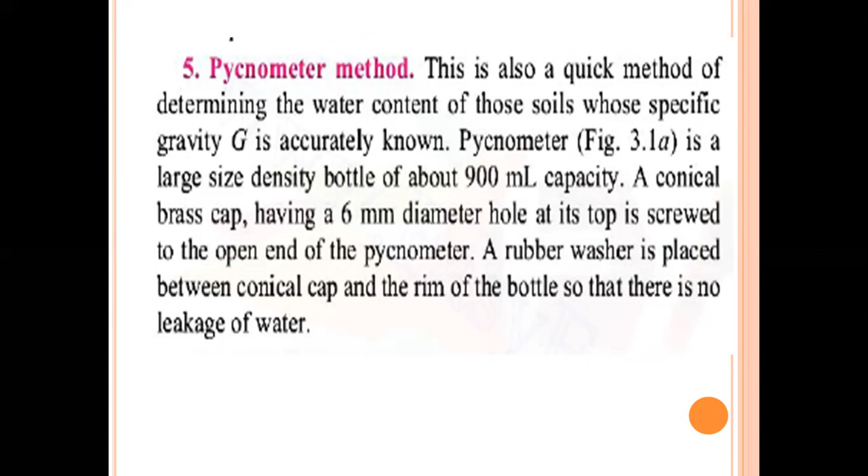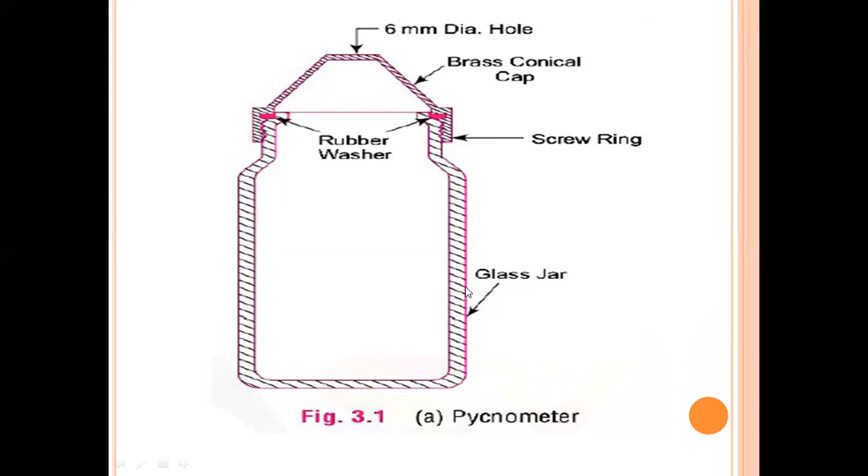The test procedure of the pycnometer method. First of all, we take the clean and dry pycnometer bottle and find its mass M1, the weight including cap and washer. Next, put about 200 grams to 400 grams of wet soil sample in the pycnometer and find its mass M2 with its cap and washer.

Fill the pycnometer to half its height and mix it thoroughly with the glass rod. Add more water and stir it. Replace the screw top and fill the pycnometer flush with the hole in the conical cap. Dry the pycnometer from outside and find its mass M3. Empty the pycnometer bottle, clean it thoroughly and fill it with clean water to the hole of the conical cap and find its mass M4. Observe that in total we calculated 4 masses, meaning 4 weights.

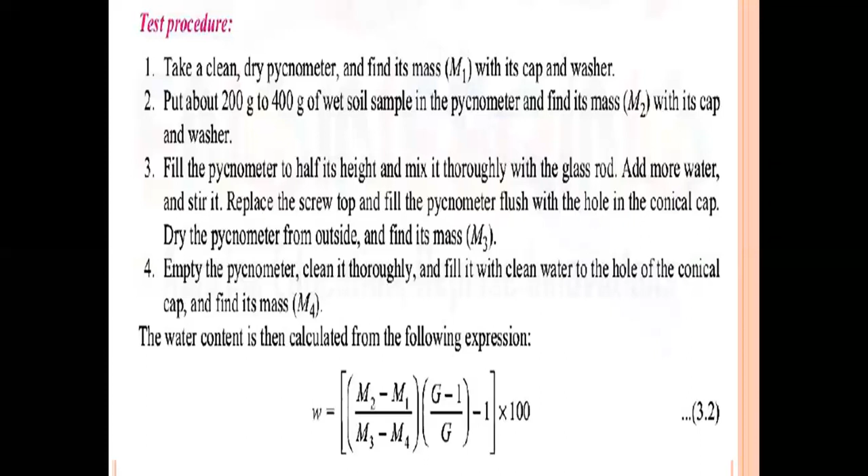Finally, the water content is calculated from the following expression. Water content is indicated by small w. The formula is w equals (M2 minus M1) divided by (M3 minus M4) into (G minus 1) divided by G, minus 1, all multiplied by 100. Here water content is calculated in percentage, so finally multiply by 100.

So here is the water content determination in the pycnometer method, masses one by one. First, the empty pycnometer bottle, totally dry and clean, is the weight M1. Second is the pycnometer bottle plus wet soil, the mass M2. Wet soil means water mixed with the solids. Another is the pycnometer plus wet soil, filled to the top of the bottle with water, taken as M3.

Similarly, all the solids and water are removed, the bottle is cleaned and filled with pure water. Then pycnometer plus water is weighed, and that mass is M4. So first mass M1, second mass M2, third mass M3, and fourth M4.

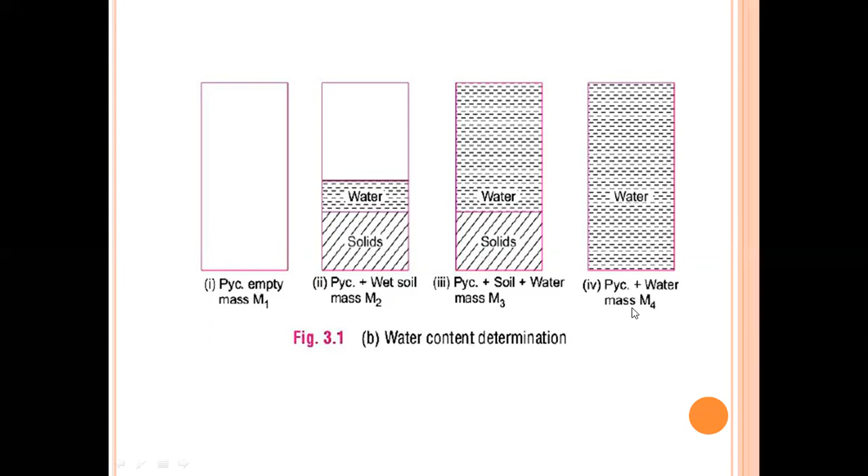This figure shows the dry mass, indicated by MD. MD is the mass of the soil particles. The volume of solid particles will be equal to MD by G. Thus, if the solids in the figure are replaced with water of mass MD by G, we get the mass M4 shown in the figure.

Thus, finally, M4 equals M3 minus MD plus MD divided by G, or MD into (G minus 1) divided by G equals M3 minus M4. From this equation we calculate MD: MD equals (M3 minus M4) into G divided by (G minus 1). Now the mass of water MW in the wet soil is M2 minus M1 minus MD.

So W is the water content, MW by MD into 100. It is the water content formula. Here MW means mass of water. This formula is M2 minus M1 minus MD. So substitute, divided by MD into 100.

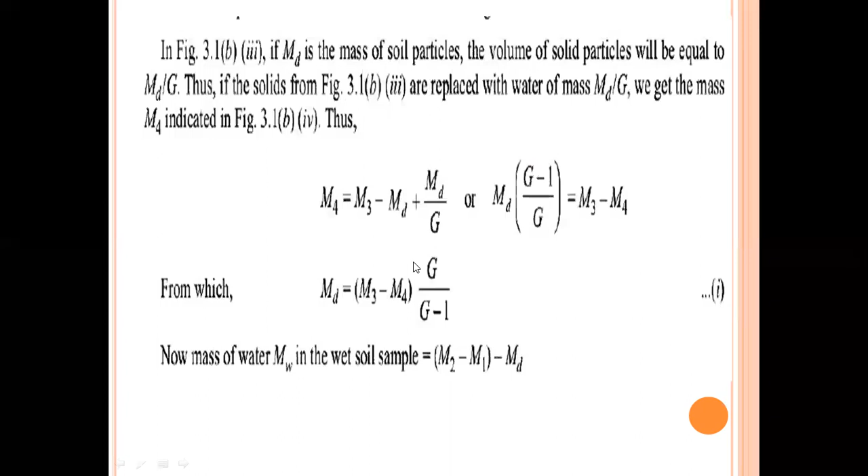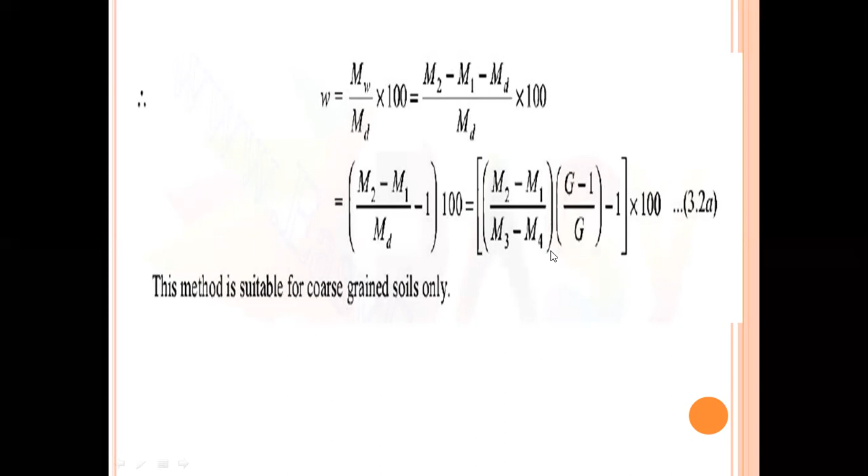So this method is suitable only for coarse grained soils. Here we calculated the water content, then after we calculate specific gravity in the pycnometer method. The specific gravity of solids is determined by 3 methods: 50 ml density bottle, or 500 ml flask, or the pycnometer. The density bottle method is the most accurate and suitable for all types of soils. The flask or pycnometer is used only for coarse grained soils. The density bottle method is the standard method used in the laboratory.

So same method. Here the empty bottle mass is M1 and bottle plus dry soil M2. Here no wet soil, only dry soil. And third one is the bottle plus dry soil, fill the water, and calculate mass M3. And similarly, the bottle totally remove the solids and fill pure water. This value is the mass M4.

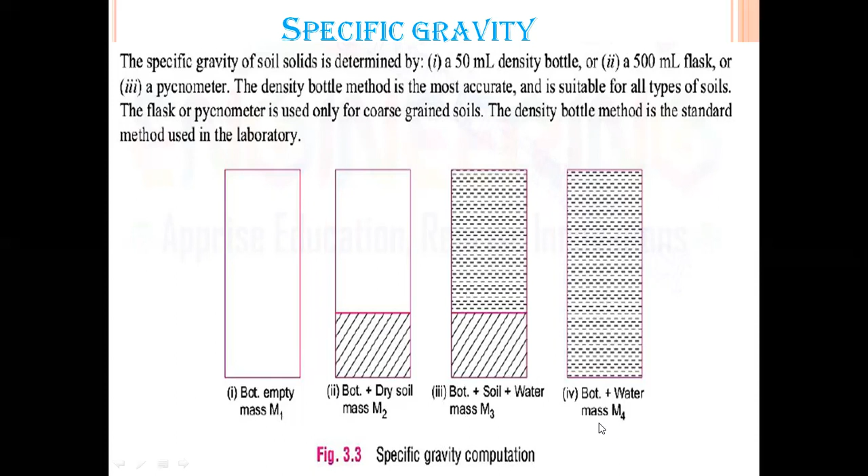However, in all three methods, the sequence of the observations is the same. The mass M1 of the empty dry bottle or flask or pycnometer is first taken. A sample of oven dried soil cooled in the desiccator is put in the bottle and the mass M2 is taken. The bottle is then filled with distilled water or kerosene, gradually removing the entrapped air either by applying vacuum or by shaking the bottle. The mass M3 of the bottle, soil and water, full up to the top is taken.

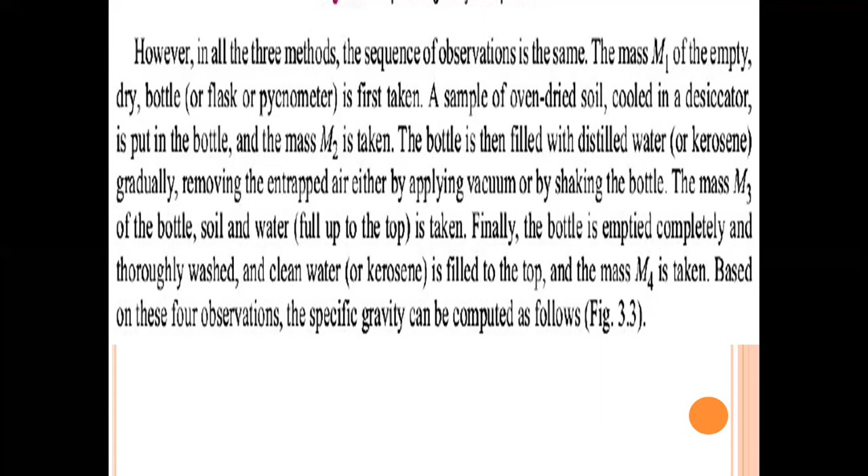Finally, the bottle is emptied completely and thoroughly washed and clean water or kerosene is filled to the top and the mass M4 is taken. Based on these four observations, the specific gravity can be computed. From the figures, dry mass MD of the soil equals M2 minus M1. Mass of water in the figure is M3 minus M2. Mass of the water is M4 minus M1. Hence, the mass of water having the same volume as the solids is M4 minus M1 minus M3 minus M2.

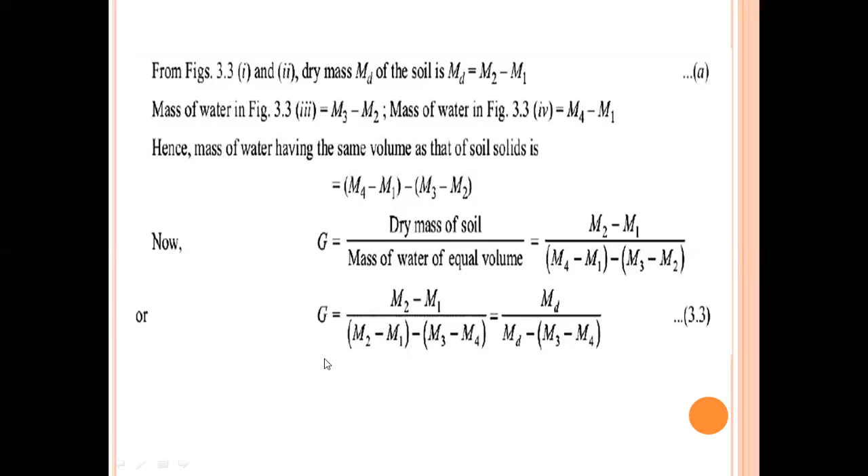Now specific gravity G equals dry mass of the soil divided by mass of water of equal volume. Dry mass of the soil is M2 minus M1 and mass of the water is M4 minus M1 minus M3 minus M2. Substitute. Then finally G equals M2 minus M1 divided by M2 minus M1 minus M3 minus M4. That is equal to MD by MD minus M3 minus M4. MD means dry mass, MD equals M2 minus M1. This is the specific gravity formula.

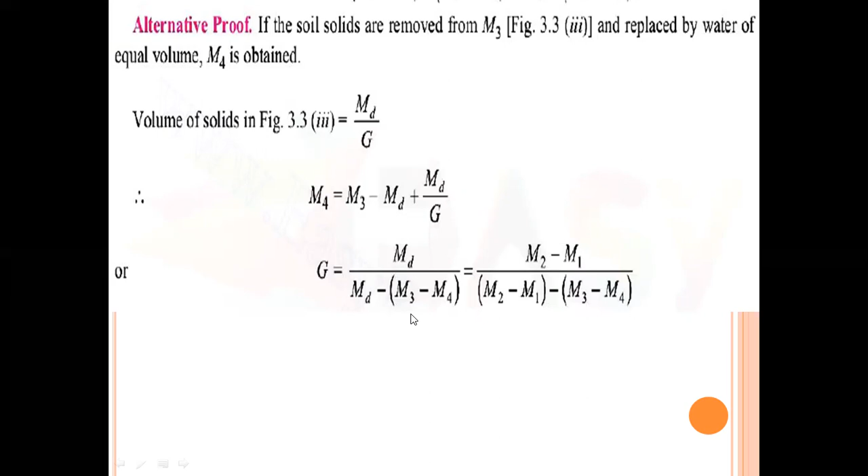Then alternative proof, temperature at 27 degrees. If the soil solid is removed from M3 and replaced with water of equal volume, M4 is obtained. Volume of solids equals MD by G. So M4 equals M3 minus MD plus MD by G. G equals M2 minus M1 divided by M2 minus M1 minus M3 minus M4, or MD divided by MD minus M3 minus M4. This is the specific gravity formula.

When the 500 ml flask is used, the mass is taken to an accuracy of 0.1 gram. In case of pycnometer, mass measurement is taken to 1 gram accuracy. In both cases, the entrapped air is expelled by stirring and distilled water is used. However, in the density bottle method, the mass measurements are taken to an accuracy of 0.001 to 0.005 grams. And kerosene is used since it is a better wetting agent.

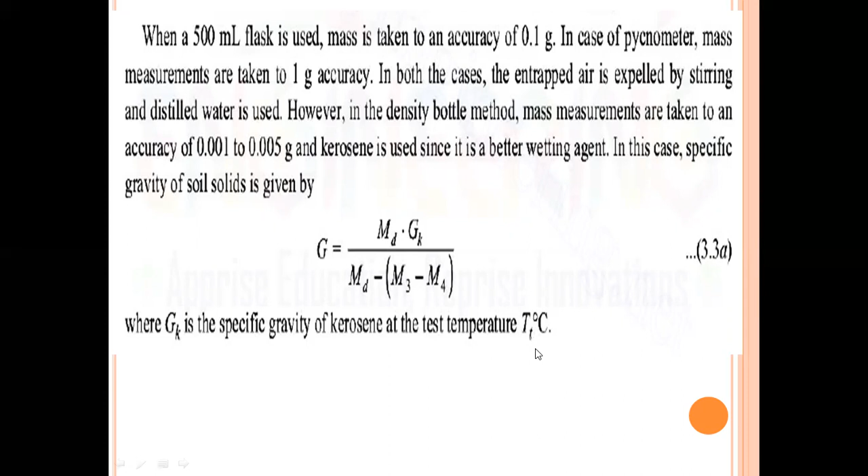In this case, specific gravity of soil solids is given by G equals MD into GK divided by MD minus M3 minus M4. Here, extra adding GK, where GK is the specific gravity of kerosene at the temperature T centigrade. T means a certain value, like 10 degrees, 27 degrees, 30 degrees, etc. If, however, the test is conducted at any other temperature T, that is room temperature, in this case flask or pycnometer, the specific gravity to be reported at 27 degrees is found from G at temperature T times specific gravity of water at T over specific gravity of water at 27 degrees centigrade.

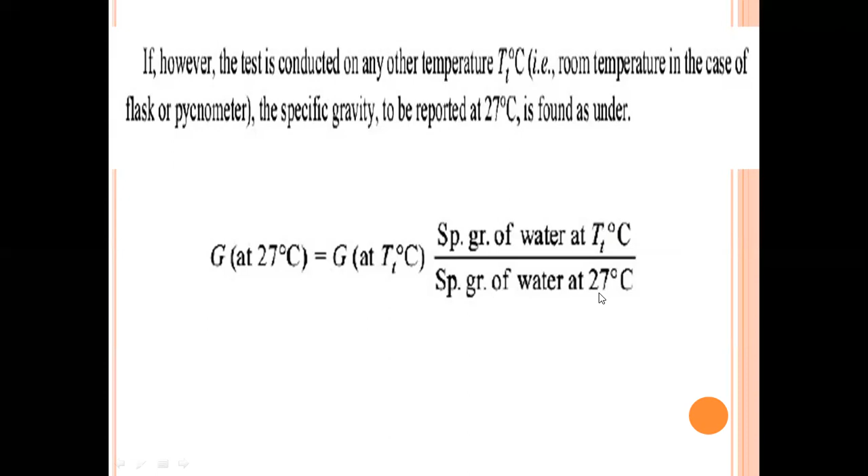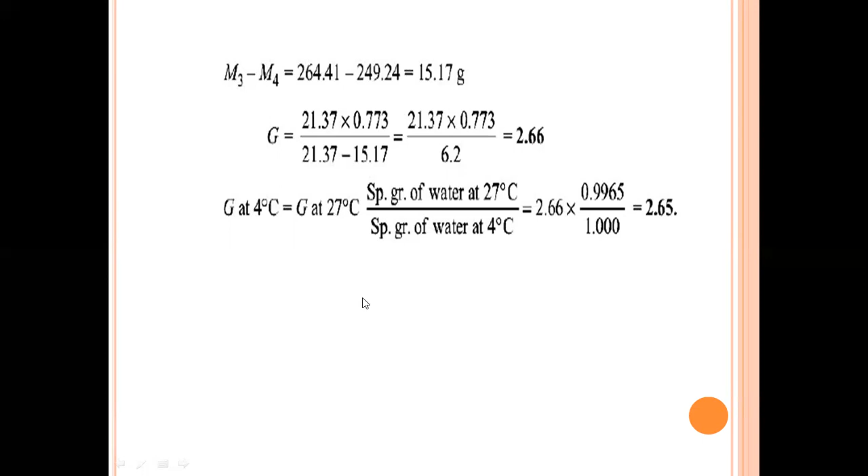It is the lab test report at 27 degrees and 4 degrees, the specific gravity value. So the 4 degrees specific gravity is 2.65. Here the specific gravity formula is the same, but the temperature is given, so multiply with GK. GK means specific gravity of kerosene. So any doubt in this problem?

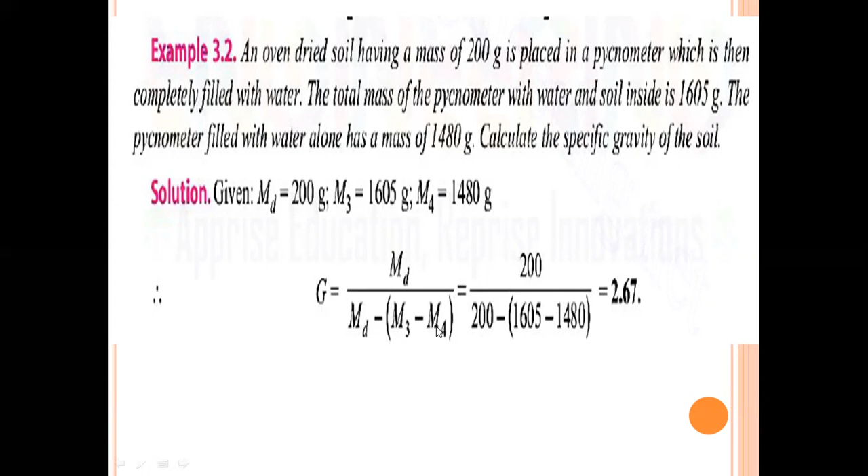So first we find out the water content. Water content formula is (M2 minus M1) divided by (M3 minus M4) into (G minus 1) divided by G, minus 1, into 100. Next one is the specific gravity. Specific gravity formula is MD by MD minus (M3 minus M4). And specific gravity at a certain temperature, with specific gravity of kerosene: G equal to MD into GK by MD minus (M3 minus M4).

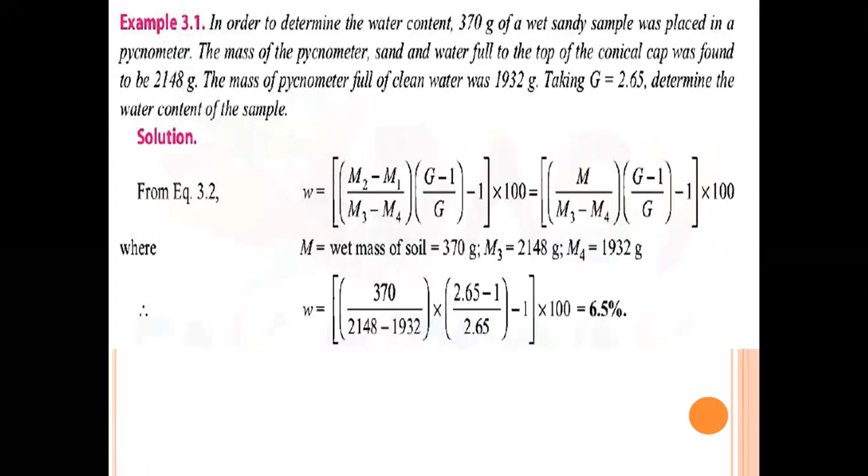So here we already discussed M1, M2, M3, M4. M1 is the empty bottle, M2 is the empty bottle plus dry soil or wet soil, M3 is the bottle plus soil plus water or kerosene, any liquid, and M4 is the clean dry bottle plus water or any liquid, kerosene, etc. These four masses are used to find water content, specific gravity, and specific gravity at a certain temperature.

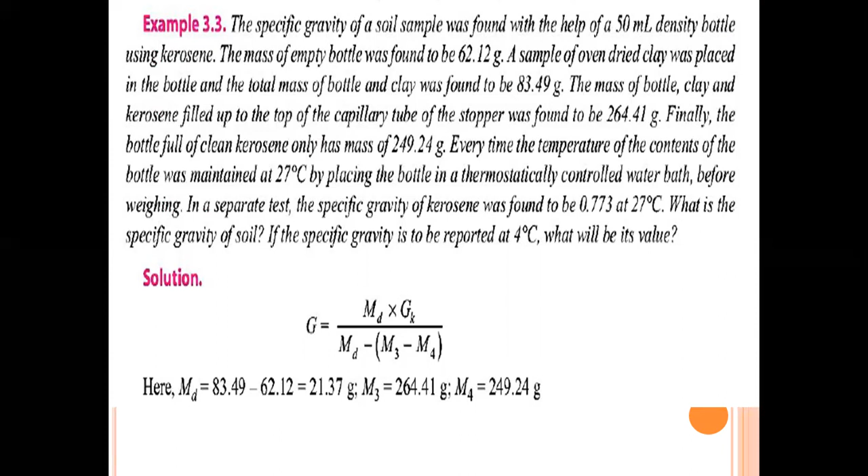So any doubt for these problems? Thank you all of you. Ask any doubts in these problems and the pycnometer method test procedure also.